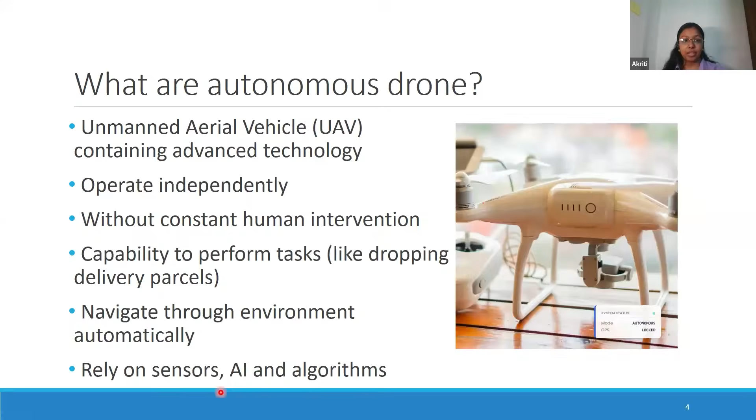So why do we say that autonomy is hard? Why is working in this sector a bit hard? Not impossible, but a bit hard. We have to admit the fact that we live in an uncertain world. What I mean by uncertain world is that sensors are noisy. What I mean by noisy is, say for example, you have a drone and your sensor says, okay, I'm at 10-meter altitude. No, it doesn't give you the reading like this. How does it give the reading?

Sometimes it will be reading 10.1, 10.5, 10.2. This kind of data is something that you get from the sensors, and then it is difficult to get what the actual altitude of my particular drone is. So that is why the sensors are noisy. That is what we mean by a noisy sensor.

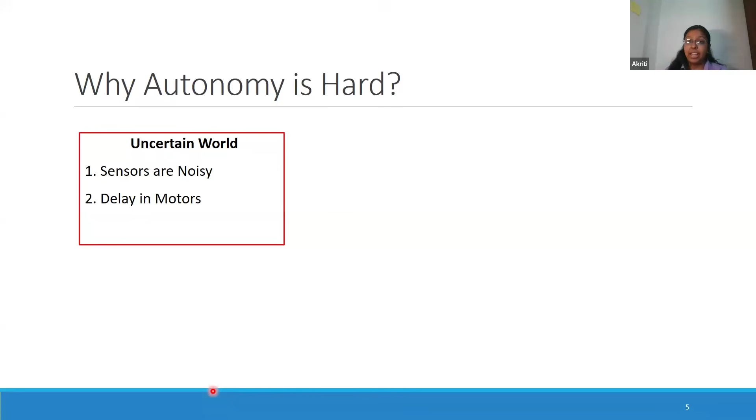Then there might be delay in the motor, right? Say for example, you said increase the speed of my motor. Even 0.5 second of delay in the motor can cause a huge difference. That is why it is important to accept that this is the uncertainty that we have to face, right? And there are some external disturbances, right?

So if the sensors are noisy, there are some winds that are going on, and physics doesn't care about the code. Physics just says that if my speed is increased, I have to go up, if my speed is decreased, I have to go down. It doesn't care whether there's some wind, some delay in the motors based on the command that you're giving, or the sensor is not giving any correct value. It will just do what it has to do. It doesn't know what you're trying to do.

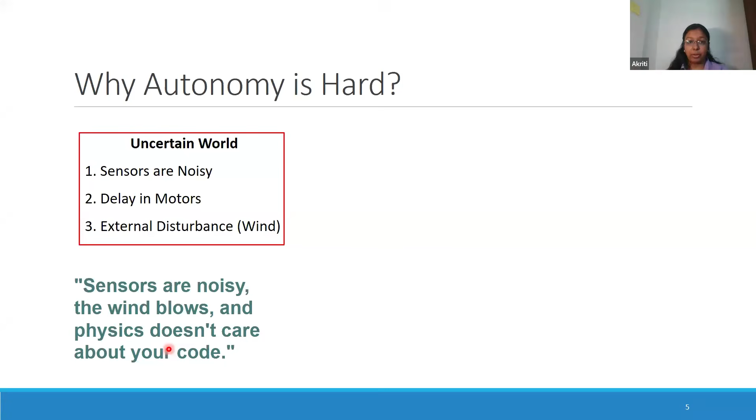So that is why this autonomy problem is split into three parts. Just remember that, or make a note of this, that autonomy has three components, right? The first component is navigation, that is knowing what state you are in, right? Then comes the second part, which is guidance, that is deciding the motion, how you will be traveling from one point to another point. And then comes control. Control means whatever navigation and guidance you have given, how I will be controlling my drone such that my mission is fulfilled, right? So these are the three parts.

We will further understand a bit more about it. We'll explore more about what navigation, guidance, and control are. But for now, this is the big picture, wherein the autonomy problem is being split into three parts, right? And why are there three parts? For modularity purposes.

Say for example, you upgrade the GPS while changing the PID controller, right? You're upgrading the GPS for navigation purposes, and you're also changing the PID controller, which comes into the control part, right? So at the same time, you are able to address the problems separately: the navigation problem separately, the control problem differently, and the guidance problem differently. That way things become dissected, such that we are able to understand the problem easily and work on it step by step, right?

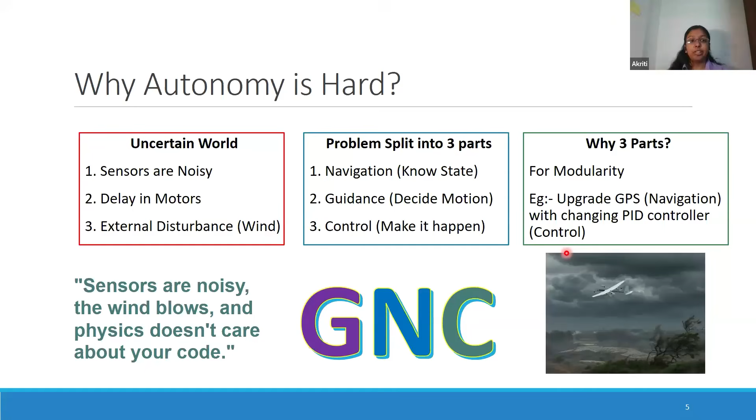So this is the basic flow of autonomy. You can take a screenshot or note it down, how the autonomy actually works. So first comes the sensor, right? We'll take a scenario and work on it step by step. What the sensor does is it knows your current position, orientation, how much acceleration there is, how much velocity there is. All this information is taken by the sensor.

Then comes navigation. In navigation, we say, okay, I'm currently at this position, and I want to go to some point B. Say for example, you're sitting at your home, that's point A, and your college or your office is point B, right? So now I want to go from home to college or my office. So that comes the navigation, right? We have selected where we want to go. That is why here we have written navigation tells you where you are. You just get to know your point, right?

Now guidance tells you where to go, right? The point B that we are selecting, that is where to go. How we will be going, that is something guidance will tell you, right? How we will be going: via bus, taking for example MG Road, then Church Street, and then we'll be able to reach our college or office. So that is what guidance tells you about.

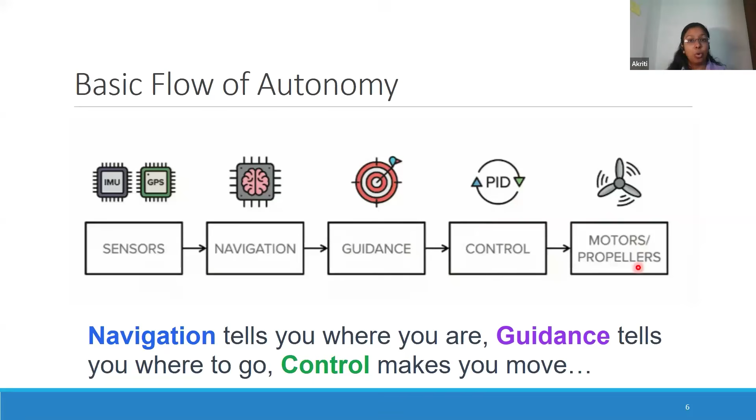Let's proceed further, right? So if you didn't understand, I'll just explain with a simple space mission analogy, because we all are here to understand about space. So first comes the guidance part, wherein we have a rocket. You might have seen some rocket launches. So what are we trying to do there? There's a rocket.

We are aiming a spacecraft by controlling the direction of its rocket thrust at launch or other timing, right? So we design a path for our particular satellite. Say, for example, a rocket will go like this, it will separate from the satellite, and then the satellite will perform its action, right? Then comes the navigation part.

So navigation is getting from one place to another while in space. This often involves long periods of coasting and short bursts from small rockets to change course. What it means here is, when we are in space and a satellite is moving, we have to go somewhere. Now there might be chances that its course might be incorrect.

So there are some thrusters available over here which help it to correct its course, the direction it is going. So that is how it works in a satellite, and how we are controlling it. So how we are changing the orientation, how we have to tilt ourselves, all comes in the control part. So that is how guidance, navigation, and control actually works in a space mission, right? So we talked a lot about the introduction part.

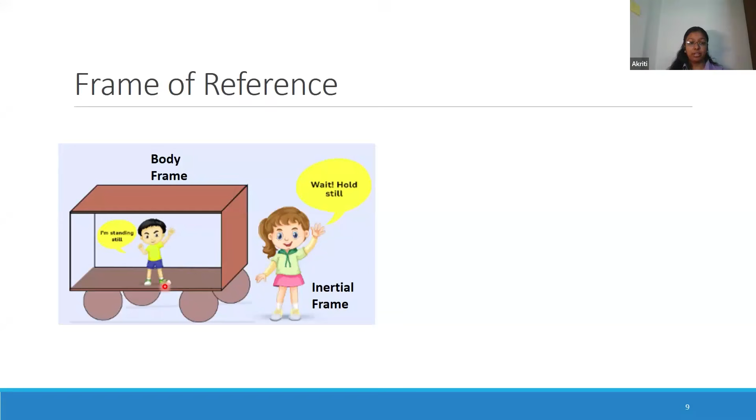You also feel the same thing. Say, for example, you are in a train, you feel like I'm sitting, I'm not moving. But the person who is outside the train will feel, okay, this person is moving with the train. So what is happening over here is, this comes under the body frame, the body that is moving, and the inertial frame is something at the global level, which you're seeing from the outside, and the body frame is the frame with which your body is moving.

Similarly, in case of our drone, we have an inertial frame and the body frame. The inertial frame is something that we measure with respect to the earth, and the body frame is with respect to the body. So all the rotation, all the position change which happens with respect to your particular drone comes under the body frame. So for the body frame, we have these three orientations: roll, pitch, and yaw. The roll, pitch, and yaw that we studied yesterday come as the orientation in the body frame, correct?

And the inertial frame is something that is seen from the outside. Maybe you are looking towards the drone; that comes as an inertial frame. You become an inertial frame for the drone, right?

Okay, so in the beginning of our navigation, I said there is something known as state. So what is state? State is nothing but the positions and velocities that we were discussing, right? In simpler terms, you can understand that there are 12 things that define flight, 12 parameters that will help you to understand the entire drone, what it is doing, at what position it is.

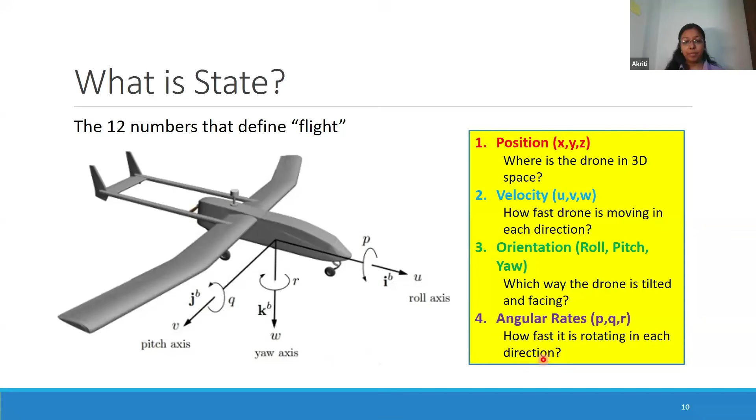So these are the 12 states. First three comes the position, knowing the location. Then comes the velocity, how fast it is going in x, y, and z direction. Then comes the orientation, and then comes the angular rate. Angular rate is nothing but angular velocity, right? So these are the 12 parameters that define the states of the drone, right?

And there is something known as update rate as well. As drone engineers, we need to understand at what rate it is getting updated, right? So how fast is my data coming to me? In simple terms, you can understand that as an update rate: after how many seconds, how many milliseconds is my data getting updated. So that is required for the stability purpose.

So say for example, I have a drone over here. Now I'm saying that my update rate is somewhere around 2 seconds. So what will happen? Say my drone is here, and after 2 seconds it is there. You understand what happened? Only after 2 seconds am I getting to know that my states got updated or my angle or acceleration got changed, right? So that is why our update rate has to be fast, and for that purpose our devices have to be fast.

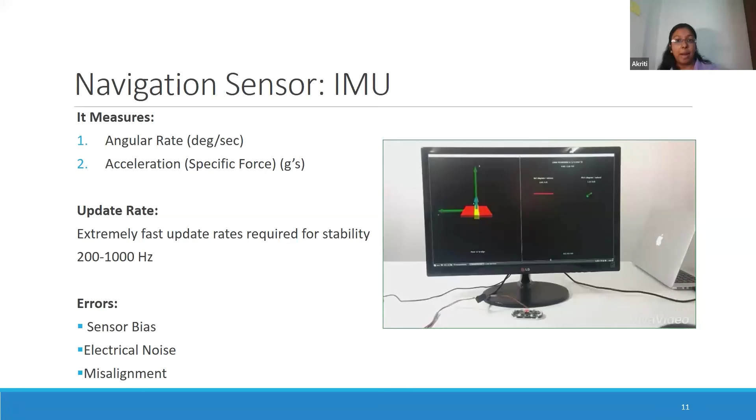So what the magnetometer does is, based on the magnetic field, the way our magnetic compass works, it works in a similar way in order to get the heading correct. So for that purpose we have the magnetometer, right? The update rate: it updates at 50 to 100 hertz, and the IMU was updating at 200 to 1000 hertz, right? So that is the difference. In terms of update rate, this is comparably a bit less, but it works, right? So this is one kind of sensor.

Another sensor that we have is the barometer. What the barometer addresses is the altitude. I told you that with the change of atmospheric pressure, we have the change in altitude. So for that, this barometer works, right? And it has an update rate of 10 to 50 hertz. This is a characteristic of that particular system. If you can get a better system which can update slightly faster, in the minimum amount of time, then it's better to have such a sensor, right?

And okay, we'll understand in the upcoming slides why the update rate of this is low, whereas the update rate of this is high, right? You'll get to know why these update rates are very, very crucial for a system when we are building a drone, right? And the third one, which you all know we have in our phones as well, is the GPS. This is what a GPS system looks like. It helps you get the X, Y, and Z positions, right? And it has a much lower update rate, 1 to 10 hertz, and it helps in correcting the long-term drift, right?

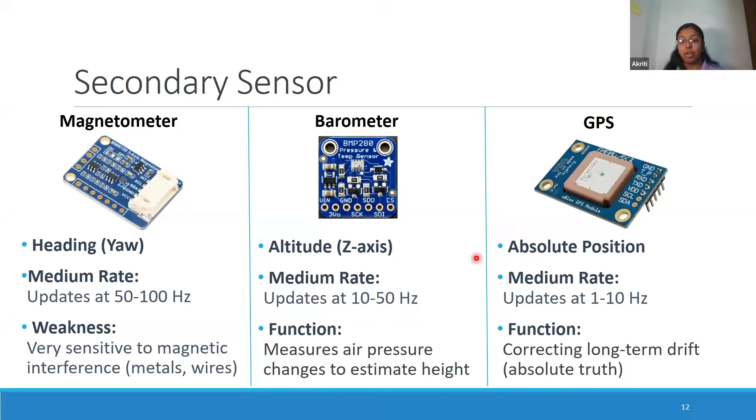All right. So we were talking a lot about the update rate. This should be slow, this should be fast. There are a lot of components: the IMU has a different update rate, the barometer has a different update rate, the GPS has a different update rate. Now how will I synchronize between all of them? It will be difficult. This is updating in 1 millisecond, 20 milliseconds, 200 milliseconds. And it is not like we can rely on only one thing and not rely on the other, because ultimately we have 12 parameters or 12 states.

How we will understand who is working at what rate, how we will control it and all that. There's a lot of juggle that is involved, because there are a lot of different sensors that we have to use with a different update rate, right?

So now we are trying to understand why sensors alone are not enough. We cannot only rely on the sensors. Then comes the sensor noise, that is, sensors are never perfect, right? That we also understood in our introductory slide. Then there is an integration drift. Okay, so this will be covered upcoming.

But I currently discussed that there is some delay and bias due to which we have to wait a lot. Say for example, GPS is updating at around 200 milliseconds. So now IMU has to wait for a very long time, for around 200 steps, so that it can get the GPS value. You're understanding? So for that purpose, it is not able to synchronize between each other. And for that purpose, we have the sensor fusion, right?

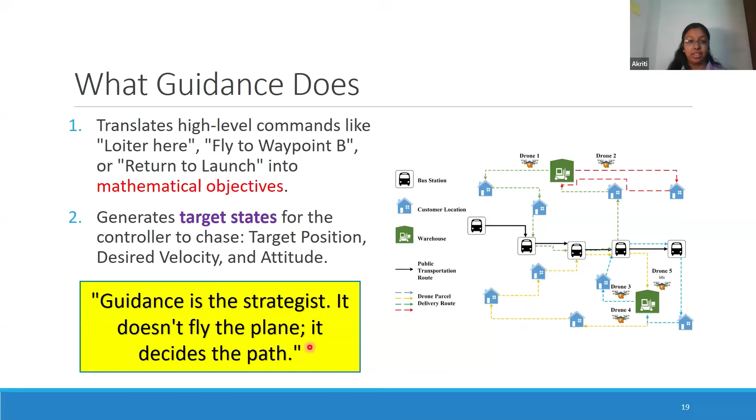It's the same way you choose a path on Google Maps for less time and minimum traffic. Maybe this path has a lot of traffic, so you can go from this path. That is what guidance is doing. I was talking in layman language, but when it comes to drones, how do these commands actually work? What are the different terminologies, which you can write down, used in the drone to understand what guidance command has been given to that drone?

The first one is hover at point, which in technical terms we call position hold. From the terminology itself you can understand that we are holding the position of the drone. It maintains the XYZ coordinates and guidance outputs a zero velocity reference. So guidance says, okay, I have to hold this position and my velocities should be zero. This is how guidance gives the command. I said hover at that point, just hold the position there.

What does guidance give? Guidance says, okay, you told me to hold the position. It says to the controller: do one thing for me. Hold the XYZ coordinate that was there previously, and make sure the velocities are zero. That is what guidance tells the controller. I hope the scenario is clear how guidance conveys the navigation states I discussed. Then comes fly to waypoint. That is target seeking, basically going from one location to another, and from that location to the next.

So let's now move to the last thing we have to discuss, the control part. How the drone is obeying the physics, how it is appreciating the physics, or how it is trying to work along with the physics such that whatever we want to achieve, we are able to achieve. Okay, so why is control hard?

Imagine a scenario where you have a cart, and there is a mass hanging on a stick, right? For example, you can assume my hand is the cart, and here I place some mass. The natural tendency of this will be to fall down. It is trying to fall down. That is what a quadcopter is actually doing inherently.

I'll not discuss today why a quadcopter acts like a broom in your hand, why a quadcopter is unstable. That is a different concept, but the drone has an inherent characteristic that it is unstable. For that purpose we need a controller to control it. Without active control, it will flip 400 times a second. That tells you the rate at which your drone can start spinning.

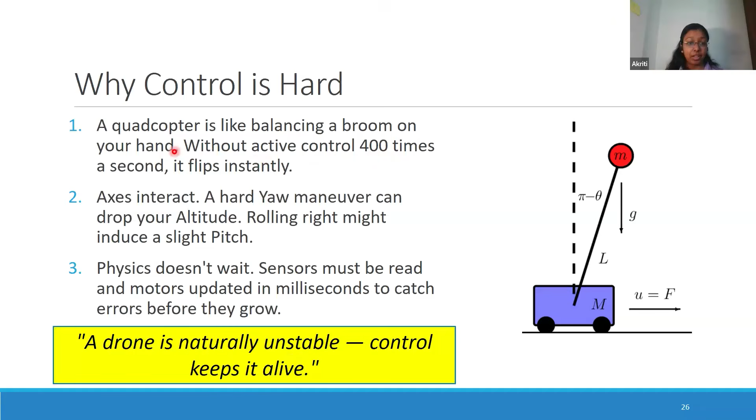So first of all, we require an attitude rate controller. Just stick with me, and you'll get a feel for why I'm saying that. Say you have a drone and you want to move in the forward direction. The drone has the tendency to roll, pitch, yaw. It can do anything. It is not in our hands. It is not like if you don't have a controller, the drone will fly like this only. No, that's not the scenario.

The reason being, say for example, your drone is going like this, and suddenly a gust comes. So for that, it will flip. The drone has the tendency to flip. For that purpose, we need an active controller. And for that purpose, we are first talking about the attitude rate controller.

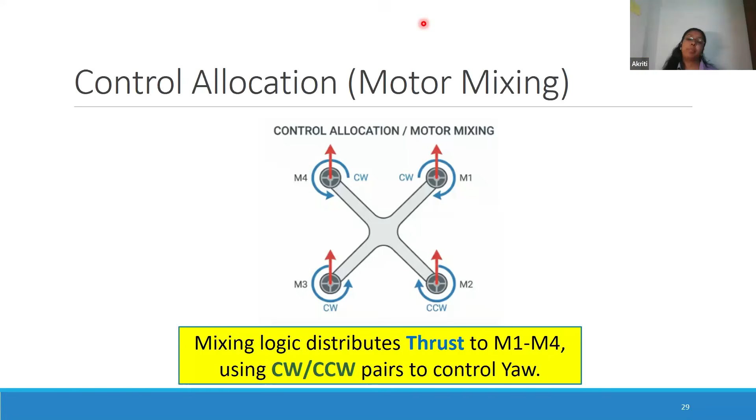So probably we can do it together. So the outer control loop typically handles attitude, position, velocity, or motor PWM directly. So we don't directly handle the motor PWM. Motor PWM is nothing but the control allocation that I was talking about, right? Then remains the attitude and position or velocity. So take it as a thumb rule that the outer control loop looks into the position and velocity, and the inner loop looks into the attitude and attitude rate. Just remember it.

Then the D term in PID mainly helps in system delay, sensor noise, or overshoot. So what do we mean by overshoot? Say for example, the example of the drone that I gave. So my drone is over here and I have to go at 10 meter, but it goes at 11 meter. So that is something we call the overshoot, right? So what the D term is trying to do, it is trying to predict the future that there will be some overshoot. So it decreases the speed of the drone such that it just goes and gets stable at 10 meter. So that is how my D term is mainly helping in the overshoot part.

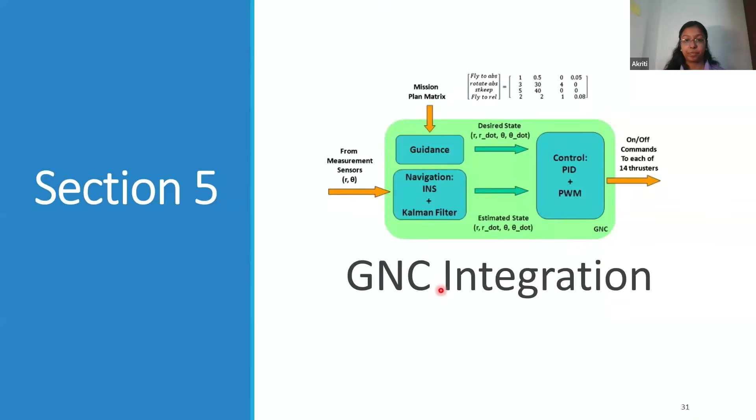Right? So now, we talked a lot about guidance, navigation, and control. But now comes the part of how these things actually work together. Some things I've told you earlier, but now formally we'll be seeing how all these things have been integrated together so that my drone flies properly with stability, right? So say, for example, you have to go from point A to point B. This is the mission that you have given to the drone. Go from this point to this point. This sequence happens hundreds of times per second to keep the drone stable and moving towards the goal. Right? So, what is step one?

Sensors measure motion. Right? Navigation. IMU detects the acceleration or rotation, and GPS checks the position. So in the first step, whatever system is there inside this checks what is the position, what is the velocity, what is the angular rate, what is the orientation, roll, pitch, yaw. The sensor inside actually measures that.

Second step, navigation estimates state, fuses noisy data to answer where I am. Here, the Kalman filter works, and finally it gives the states, right? There are a lot of sensors. It culminates what all the sensors are giving, and finally gives you one particular state, meaning position, velocities, acceleration. All this is given as an estimated answer, so that whatever noisy data we are getting is removed and we get the accurate value, right? So from there, we are able to understand where am I, right?

Then the third step is the guidance. Guidance computes references. It calculates error to target and desired velocity, right? It calculates, here I want to go, here is my drone. It calculates what is the error between point A and point B, like how much distance I have to cover, 5 kilometer, 10 kilometer, that becomes an error, and the desired velocity, with what velocity I have to go.

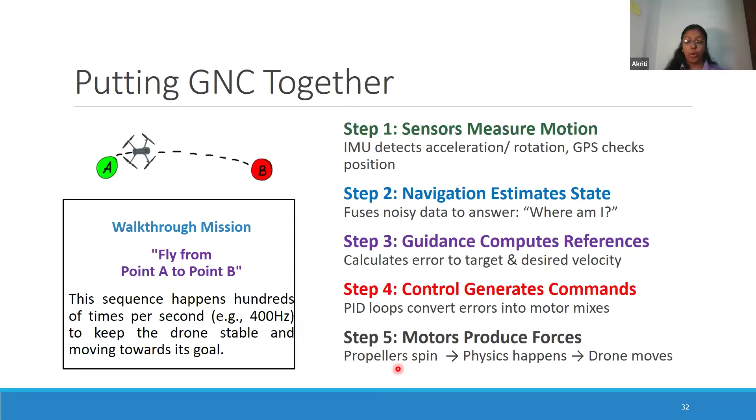right? So this is something that we have studied earlier. I'm showing it again for your reference: how, with the help of sensors to navigation to guidance and control, we are able to control the motors and propellers, right? Timing and latency budget are critical at every stage of this loop, right?

So this is the advanced concept which I'm not teaching right now, but I've emphasized a lot about the update rate. The update rate is very, very critical. If the update rate is low for one particular system and fast for another system, it will not be able to function properly. There has to be a synchronization.

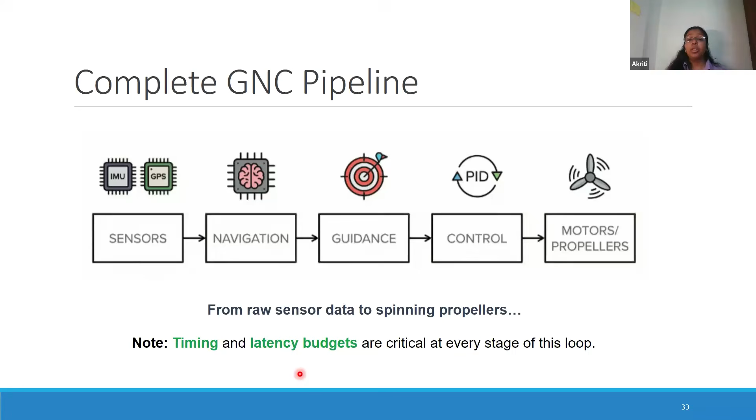When I want the update rate of one particular subsystem, when I want the update rate of another particular subsystem, and timings. So these things are very, very important to understand. Only then will things go in synchronization. Otherwise, the drone will go haywire and probably it will crash.

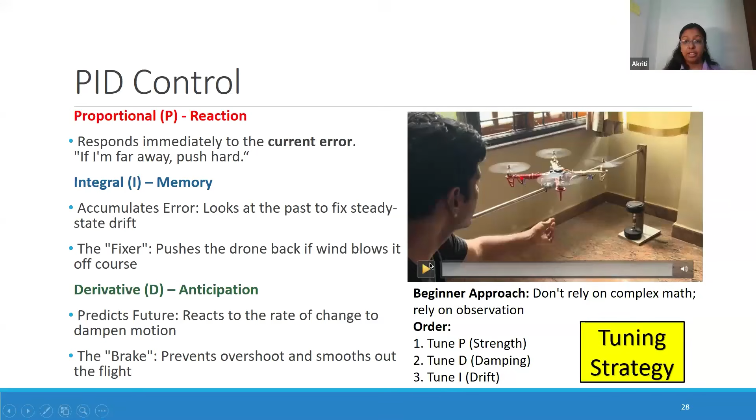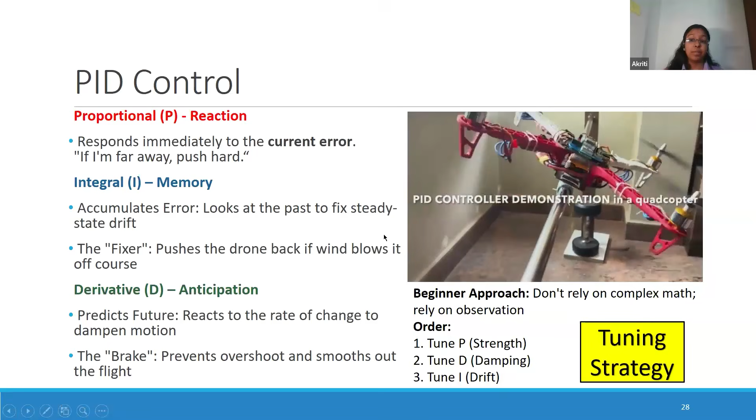Similarly in the case of a drone. I told you about PID in a nutshell, but in the next class we'll look at the PID controller practically, and you will understand how these P, I, and D values work such that my control is accurate. Over here also, you can see it's trying to give some disturbance. Due to that disturbance, some error will come, and that error correction is done by the PID so that my UAV is stable.

I just said it in a nutshell. So that is how the PID controller works. If you didn't understand, just read about it, browse through it, and slowly you'll get hands on with it. Okay?

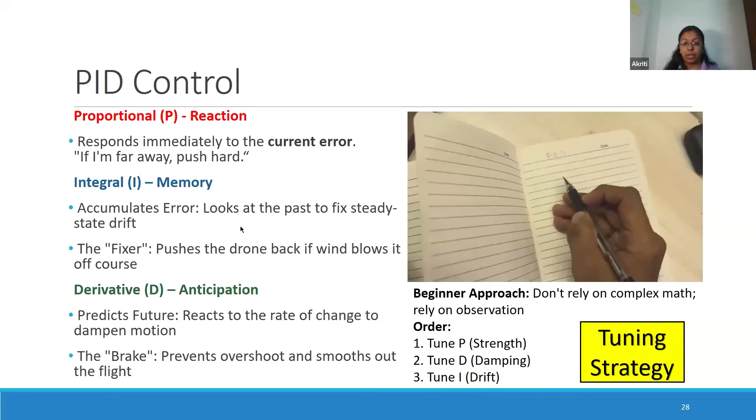If you currently achieve the steady state at 9 meters, and your error is not compensating to reach 10 meters, then if you increase the value of I, it will try to move towards 10 meters. So that's what I is doing, but all three are trying to minimize the error. Oh, thank you.

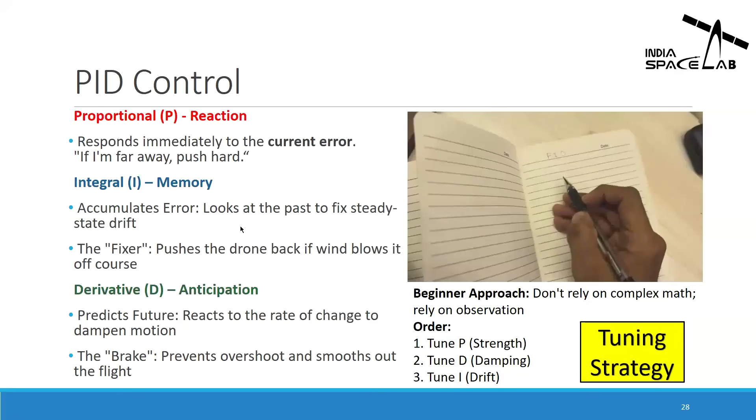Actually, I didn't understand the concept of sensor fusion. Could you please repeat it again? Yes, sure. So I'll tell you what the problem actually is. I took the example of IMU and GPS here. In the real world we cannot trust our sensors. Why are we not able to trust our sensors? Because there might be some noise, or they might not be updating things fast enough.

For a drone system, everything we are doing needs to be at a fast pace. If you're from an electronics background, things have to be very fast. Say for example, the Wi-Fi on which we are watching this Zoom meeting: if that is not at a fast rate, we'll not get the correct performance. So there are two problems which happen in sensors. Now I'll come back to IMU and GPS.

IMU has some advantages and GPS has some advantages. The advantage of the IMU is that it is fast. It is able to give values faster, but there is a lot of drift. What I mean by drift is, since it is converting mechanical energy into electrical energy, there might be some error in the values given by the IMU.

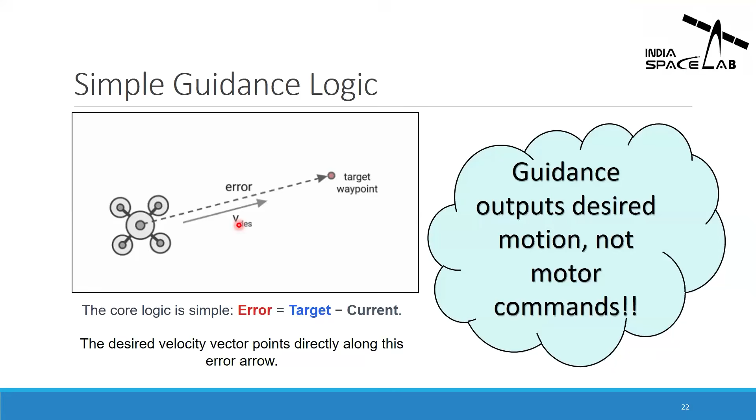I'll tell you in short, for the sake of time, what is this roll, pitch and yaw. So if you could see a drone, this is one of the drones that I have. So what is roll, pitch, and yaw? We have to change the direction of a drone, maybe in this direction, or in this direction, right? So whatever changes we are doing in this direction, that we call pitch. And if we are trying to roll, this becomes a roll. If along this axis we are trying to rotate, that we call roll.

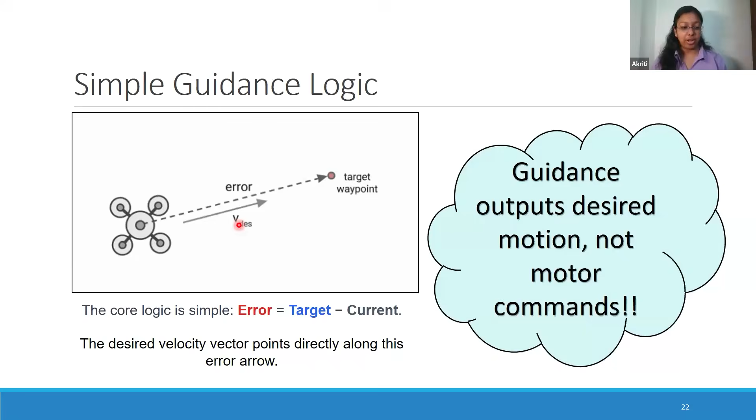And if we are trying to turn left and right, this we call yaw, right? So this is our pitch, this is our roll, and this is our yaw. If we are going up and down, pitch; if we are going this way, it's roll; and turning left and right, this is yaw. So this is what I told you about pitch, yaw, and roll, the one we were talking about.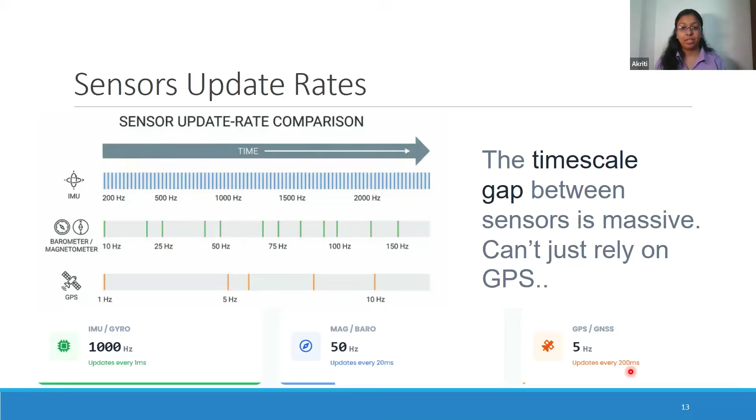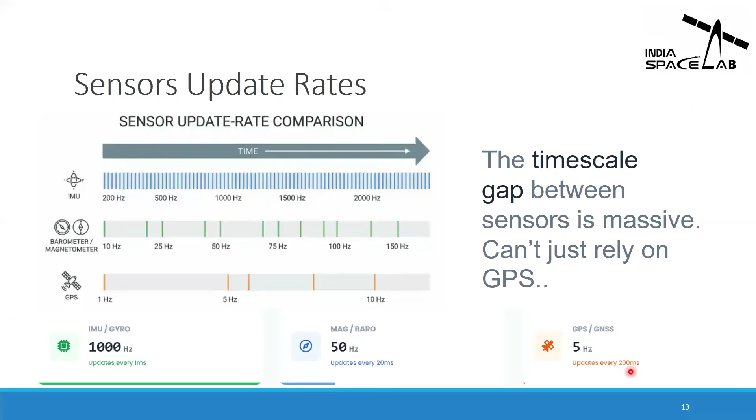I have a question from the navigation section. When you talked about why sensors alone aren't enough, there were three parts: IMU, GPS, and all. As a solution, you talked about sensor fusion. Right. Okay. While using sensor fusion, can we use AI along with that for better accuracy?

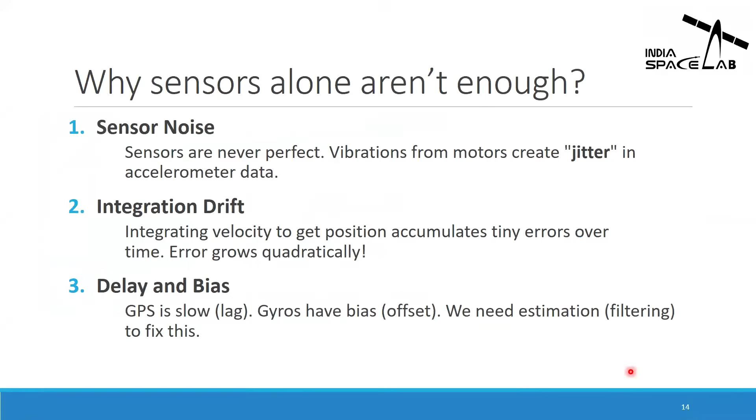Okay. So I'll tell you about what AI actually does and why we emphasize sensor fusion. The problem of AI is that it needs a lot of data, a lot of previous data. Only then will it be able to tell you what the estimated state would be, right? So AI may or may not be accurate in this case.

Whereas with sensor fusion, we are fusing two sensors which have their own capability. One is probably giving you better accuracy, the other is giving you less accuracy but it is faster. So by doing this kind of sensor fusion, you might be able to get a much better estimated state. But currently a lot of research is going on into how AI can be implemented in this Kalman filter such that we get more accurate states.

So currently, for simplicity and for reducing the amount of data that we need to store in our microcontroller, we are focusing on the sensor fusion part. But yes, AI might be the future of sensor fusion or Kalman filter estimation.